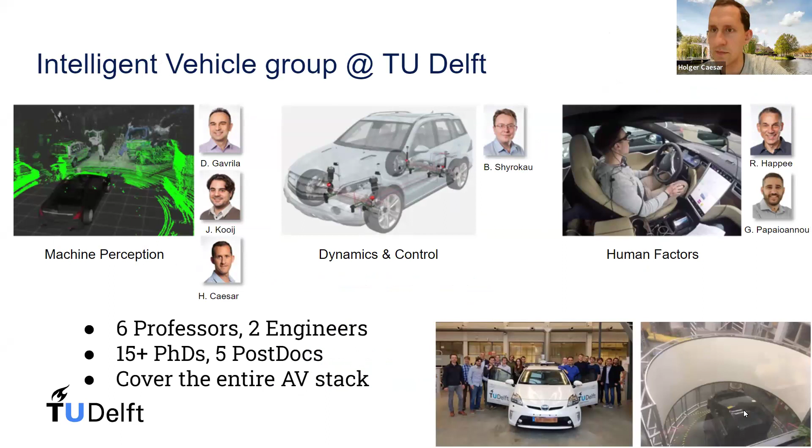And for those that have never heard of Delft before, Delft is a small town, a little bit like a miniature Amsterdam in the Netherlands between The Hague and Rotterdam. So if you want to visit us, you're always welcome to come by. One good reason to visit us might be the RSS conference, which this year is in Delft.

And we're actually going to demo something there, which is an advanced vehicle summoning feature. So a bit like the Tesla, but more advanced, hopefully, in that it evades pedestrians, cyclists, etc. on the way. And this is very much built with Autoware. So we really wanted to go away from our custom in-house build to something more standardized and shareable, with a nicer architecture.

Okay, now I want to talk a little bit about my own work. My overall research goal could be phrased as how to collect, annotate, train, and evaluate sensor data more efficiently, and also, as Rahul said, at scale. So data collection sounds easy, creating new data sets. Annotation is especially auto-labeling, so how can we automatically label vast data sets? In terms of training, we're looking at lesser forms of supervision, but also foundational models. And then evaluation, especially also simulation as a tool for evaluation. And that's exactly what I will talk about today, although I do have to skip the training part since we don't have that much time. But maybe another time.

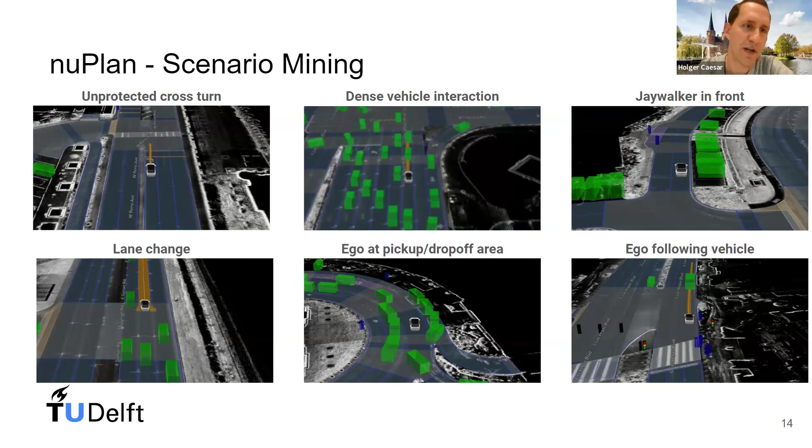And the idea is basically that you should not just evaluate on just driving straight most of the time, but you should be evaluating on specific scenarios to really see what is the performance of my planner on lane changes, what's the performance on jaywalkers, etc.

And we also extracted traffic lights. So of course, you can use computer vision to detect traffic lights, traffic light bulbs. But what we did was to go with the motion. So we used the motion of these agents. And when they're moving, then we set the traffic lights to green. And when they're not moving, or when there's no observation, then we set it to red.

Of course, it's not perfect, but it's quite nice. And for your simulation, you get data from all sides of the traffic light, from the intersection, not just the one that you're currently looking at. So that's quite nice.

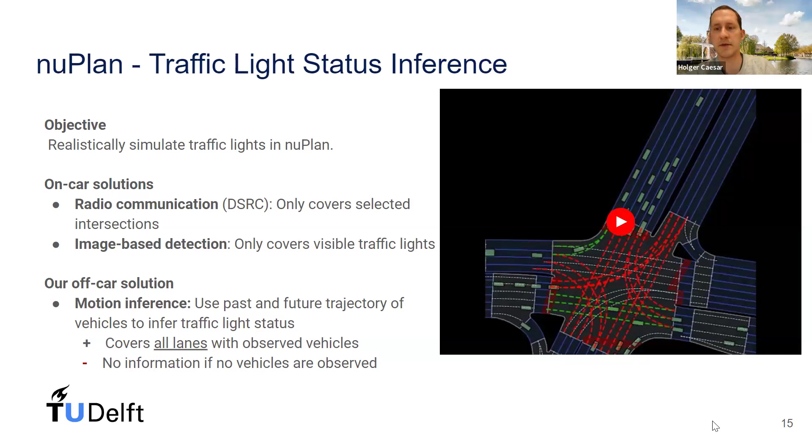Okay, going further in a separate work, we tried to improve this kind of offline perception system even more. And we also worked on offline tracking. And in particular, we wanted to integrate the prior assumption, prior knowledge about object permanence. So this is something that young children cannot do yet, but adults know very well: objects never disappear, right? They should always be somewhere.

And because our method has both a map as input, but also the assumption of object permanence, that's why we're nicely able to track objects even while they are occluded, which most of the other offline perception systems are not able to do. And that, of course, is very nice when you want a data set where you never actually lose tracks.

And what we do is we kind of remove the ground plane, we cluster these objects, we do some tracking, and then also self-training to have a detector that is a bit more consistent, because in the beginning, for example, static objects, you don't get them. But after a few steps of self-training, you do capture them.

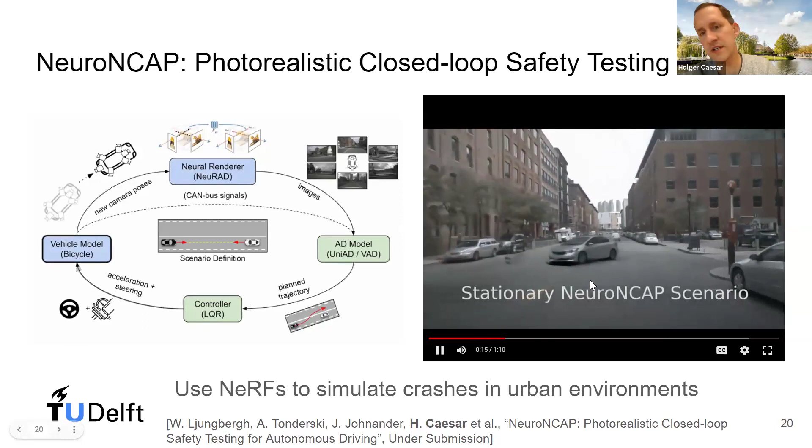So this is the original dataset, normal driving scenario. Now we go back and we have three different scenarios. One is a car is static, so the car is just parked here and you need to avoid it. And the other scenarios are here on the left side, a car comes racing towards you. And on the right side, a car comes here from the side. So it's static, frontal, and side.

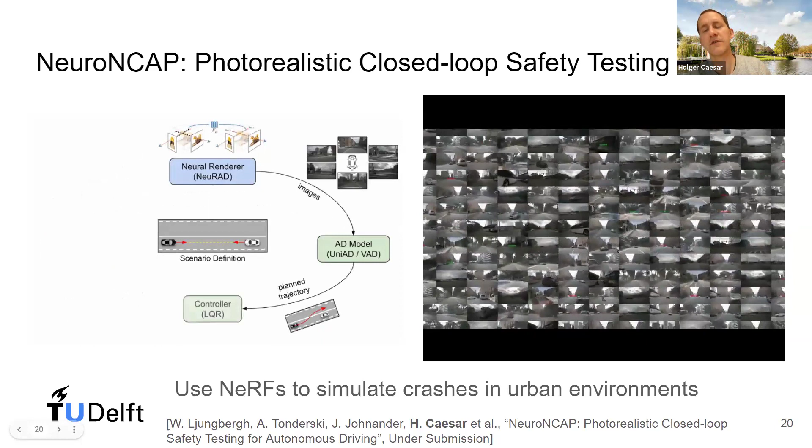And then we just run these state-of-the-art planners on it, and we see that half of the cases, they crash, which is very shocking. But we hope that with this kind of standardized benchmark in the future, people will develop better planners. And the idea is, of course, they are doing not so well because they've never seen these kind of crash scenarios. So maybe by training for these scenarios, we will be able to develop planners that are able to cover these scenarios. Okay, then moving on.

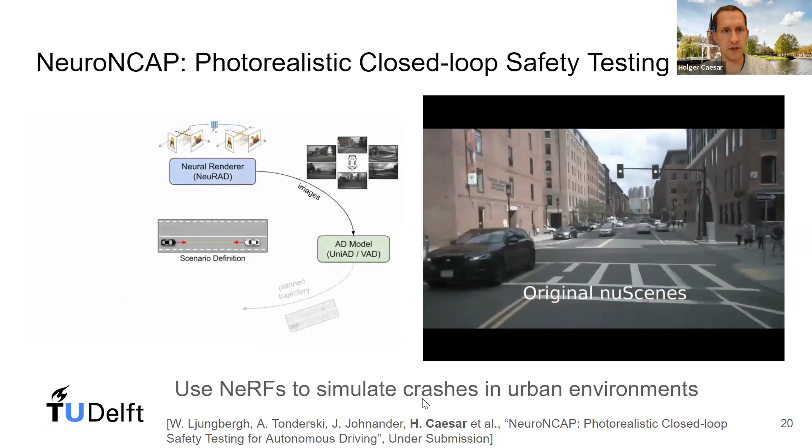Okay. A few other topics that don't really fit into the theme here are, for example, using raw 4D radar data. So this uses from a 4D radar the radar cube data. So you can imagine here azimuth, elevation, and range. And then we project that down to a bird's eye view and a front view, and we also fuse it with camera. Run some transformers on that, cross attention.

And this gives pretty nice results on this K-Radar dataset. So it's a dataset with really tough conditions, snow, fog, rain, etc. And we actually managed to outperform even the best camera plus LiDAR method using camera plus radar. Because, of course, the radar can kind of penetrate through this adverse weather and get really good performance here.

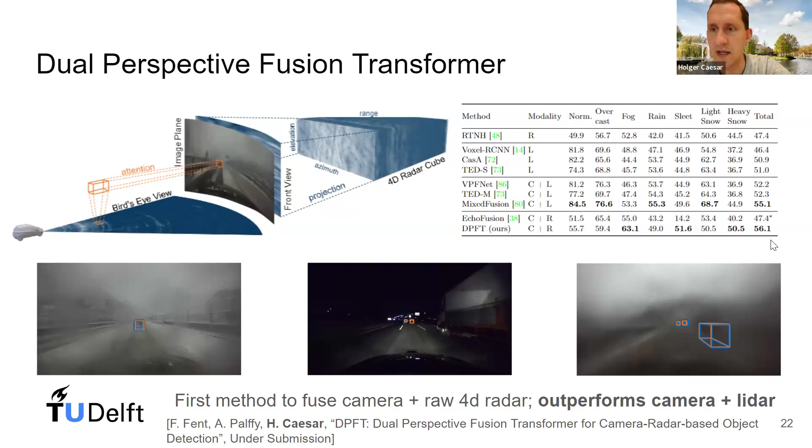And the last work is the ongoing work, trying to bring this all to bicycles. So as I said, hopefully Raoul will drive it someday. So we put three LiDARs on a bicycle, also three cameras, IMU, GPS. And now we're trying to capture data from that. And we're trying to basically develop nice models for perception and prediction and so on to really understand how bicycles move. And this can be helpful for cars, but also, of course, for bicycles themselves, to optimize our cities for that, etc.

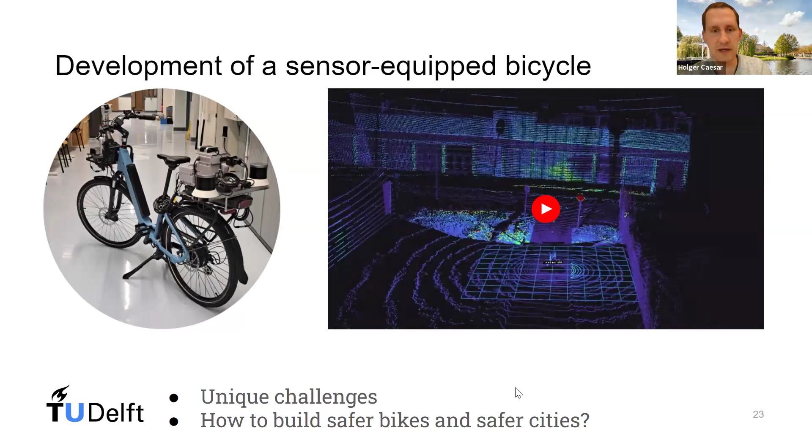And there are many unique challenges, such as the roll of the bike, the fact that the frame is not rigid, so calibration is a mess, and many other challenges. And if you want to know more about that, we can have a chat about that. Okay, so to summarize, my work is about how to collect, annotate, train, and evaluate sensor data more efficiently to hopefully develop more scalable autonomous driving solutions. That's everything. Let me know if you have any questions.

Yeah, hi, Professor Caesar. I'm from University of Delaware. I have a quick question about NeuroNCAP. So right now, what we're doing at the University of Delaware is we're trying to standardize a set of simulators that the autonomous vehicle needs to have when it goes through testing. Because if you're just testing using CARLA or Unity, the sensor model isn't that good.

So we've created a framework that allows all the state-of-the-art simulators to communicate with each other and be synchronized with each other. And I see in NeuroNCAP, you said you use NeRF to recreate the scene. So can I ask, how is it that you arrived at this combination of simulators that generated photorealistic data?

Yeah, I think it's just really the fact that we want to synthesize, especially the agent, right? So the environment is, of course, something we could do for a long time. But now with this new generation of NeRFs, we're also able to synthesize the agent. And I think that's something we were missing in the past. If you look at the work done by Waabi, for example, Raquel Urtasun, there was still room for improvement. So I think it was a natural choice to work with NeRFs here.

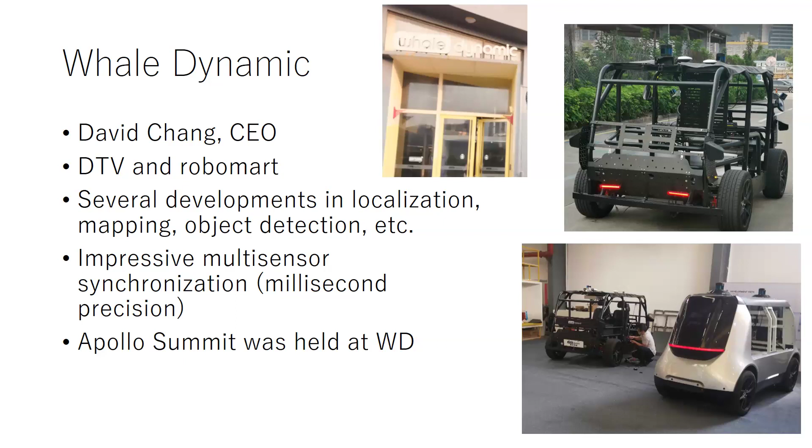While I was at PIX, I had the chance to meet with Cristian Gariboldi, who is present here. He is a master's student at the Politecnico di Milano and also at Xi'an Jiaotong University, in a dual degree program. He's been working with PIX Moving as an intern and doing his research there. He has a very interesting topic. We discussed where to present it and considered that the Center of Excellence is a good opportunity. So if you allow Cristian a couple of minutes to briefly present what he has, I would really appreciate it. That's all for me. Thank you.

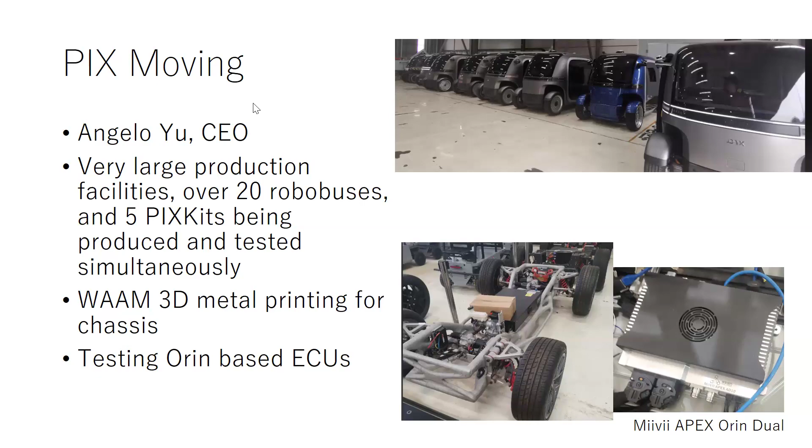Thanks, Alex. These are a lot of very exciting engagements across China, and I think they have fantastic facilities. And thanks to Gordon for organizing this. I hope we can have more engagement with the universities from the mainland and that they can participate. One of the key things is for universities or members to participate in these member meetings.

And going back, Alex, to the Autoware workshop. Could you share how many speakers are confirmed and how many contributed papers there will be? Then in the course of the next week we can share the program with everyone, at least a draft, because we still have some time. The main reason I'm asking is that if we need to, we can get other members from the CoE to fill up the agenda. Yeah, the agenda is currently an interesting challenge because the foundation would also like to see some industrial members joining the workshop.

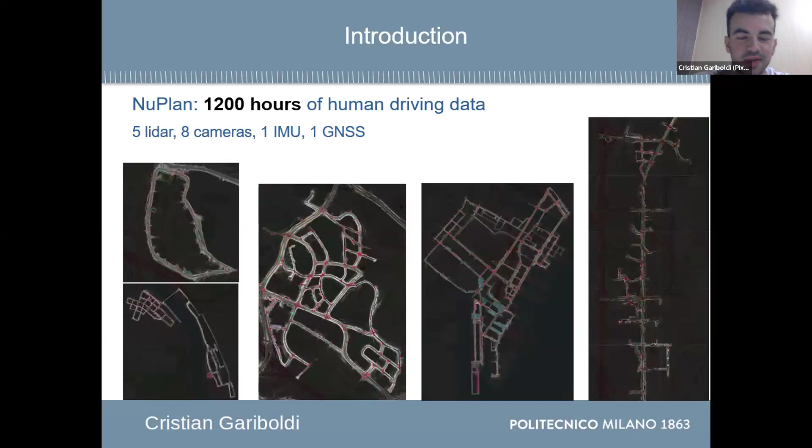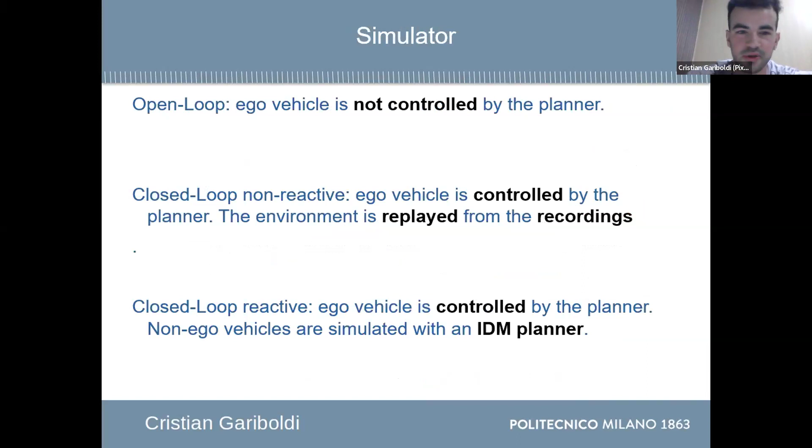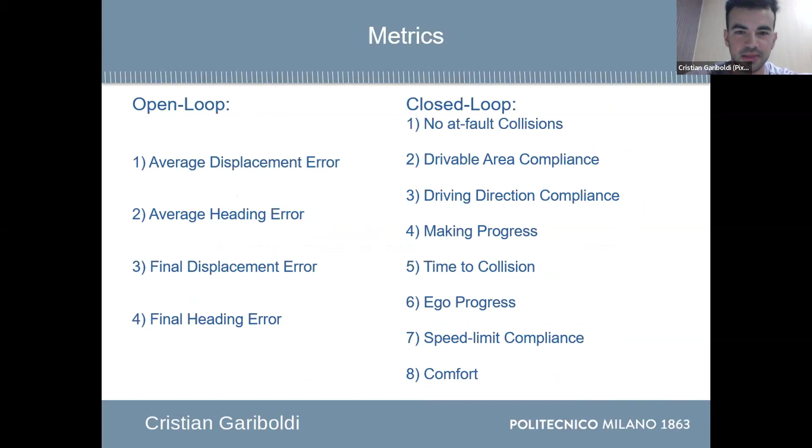And the simulator offers some metrics, open loop and closed loop, which are great for evaluating the planner, for imitating the human driving style, and also to check if it has a safe closed loop driving. And these are the metrics. I analyzed some baselines, and we can recognize a pattern. We have some learning-based, rule-based and sample-based planners here. The first three are learning-based planners, and they are excellent for imitating the human driving style, as they can score high open loop performances, but they cannot provide a safe closed loop driving.

Also, as Caesar said before, if you try to evaluate them in unseen scenarios, their performances drop dramatically. On the contrary, rule-based and sample-based planners cannot imitate the human driving style, but they can score high closed-loop performances. That's why I decided to design a single planner that can provide both high open-loop and closed-loop scores by combining learning-based and optimization-based planners.

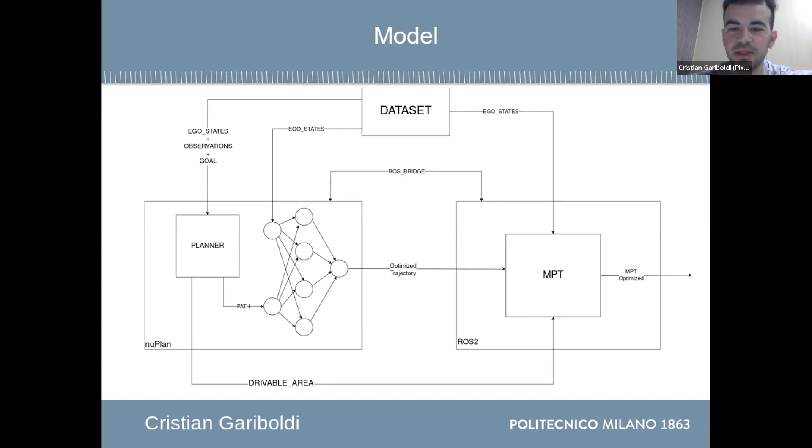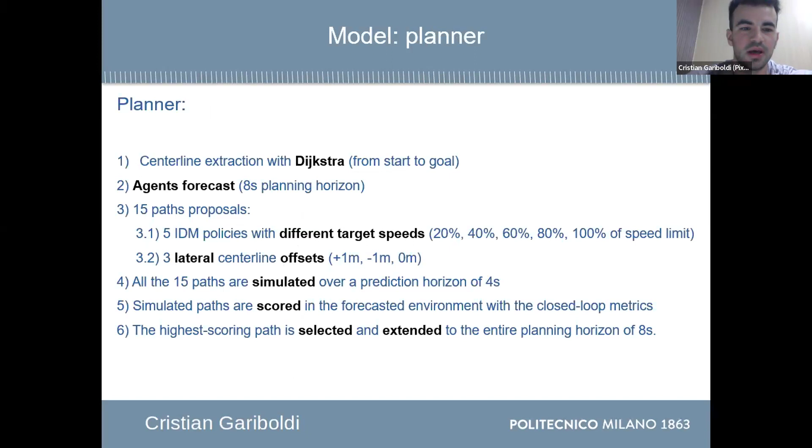So on the left, I developed this learning-based planner, which is integrated with the ROS2 environment with a ROS bridge. Within the ROS2 environment, I'm using the MPT, which is Model Predictive Trajectory developed by Autoware. These are the details about the blocks in this scheme. But the important thing is that the planner provides a center line, a path, and the multi-layer perceptron optimizes that path to minimize an L2 distance between the human trajectory and the input, so that it can output a human trajectory. Then it gives the trajectory to the MPT, which optimizes it and makes it safe for driving autonomously, also for unseen scenarios.

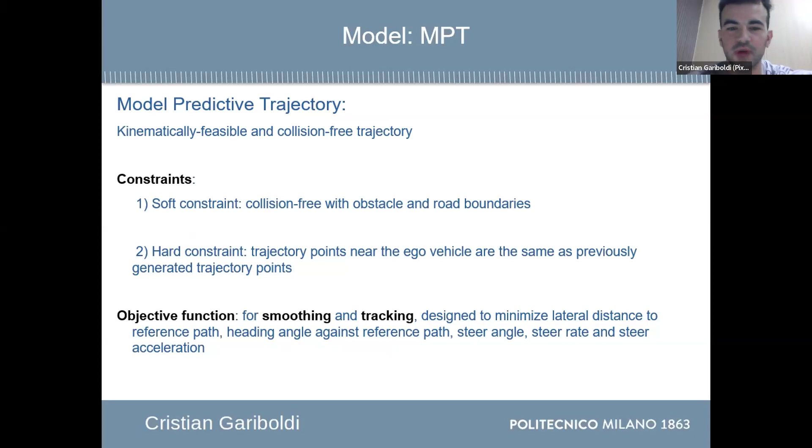And I tested this planner in the ROS2 simulator because there are some advantages. The first one is that the simulator has the same control and planning algorithms as the real vehicle, because my final goal was to apply this planner to the real vehicle. The second reason is that in the ROS2 simulator, I could use different maps and different scenarios, so I could test the generalization and robustness capabilities of the model.

And I think there are two limits of the NuPlan evaluation metrics. Maybe we can discuss it later if we are interested. The first one is that NuPlan evaluates the ability of the planner to perfectly imitate the trajectory of the human driver in that specific scenario. But personally, I think we can achieve very good human trajectories even though we don't perfectly imitate the one in the simulator. The second one is that NuPlan evaluates the predicted trajectory, but not the one actually traversed by the ego vehicle.

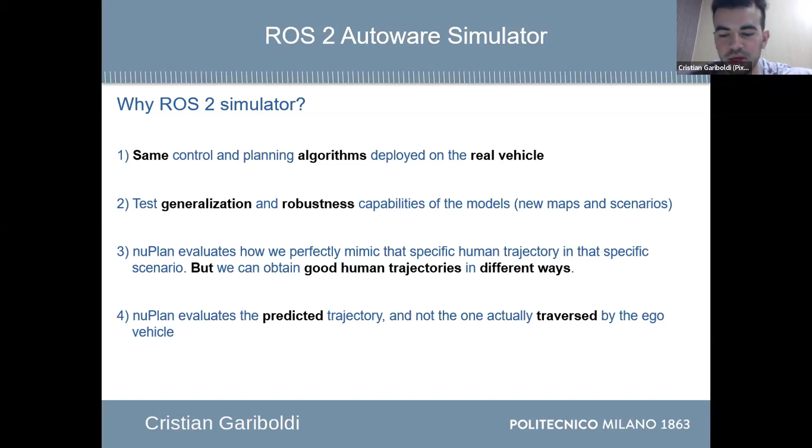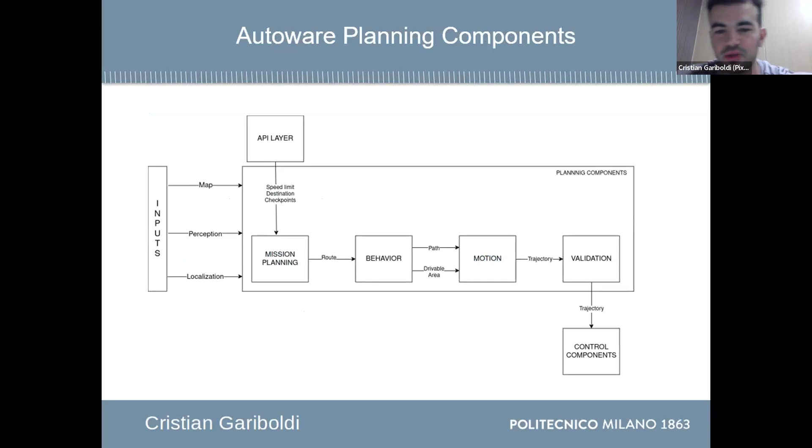Since I wanted to develop my model for the real vehicle in the Autoware environment, this is the Autoware planning component structure. We have a mission planner, a behavior path planner, a motion planner, and in the end, we give the final trajectory to the control components. So what I did is I added this block between the behavior and the motion planners, so that we take as input the behavior path and optimize it to generate a human trajectory, which is given to the motion planner, the optimization-based planner.

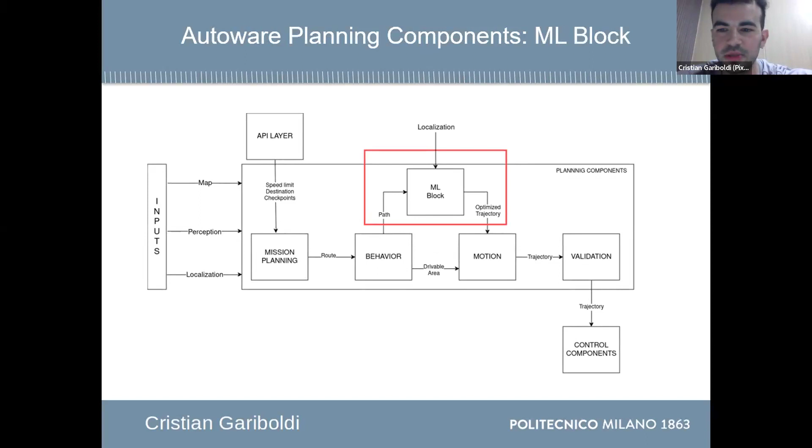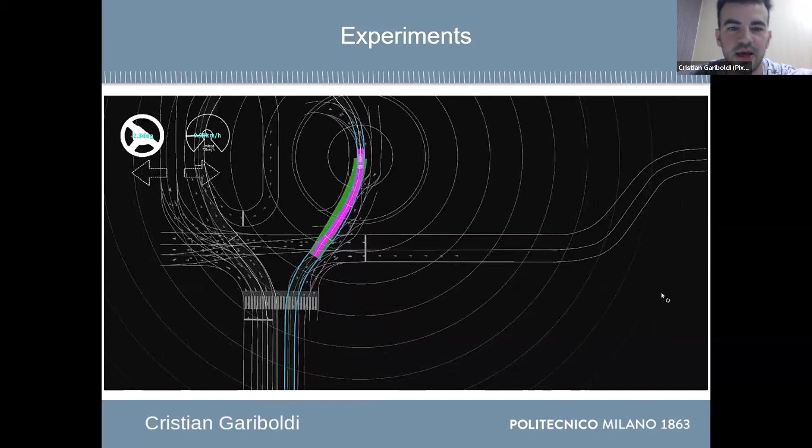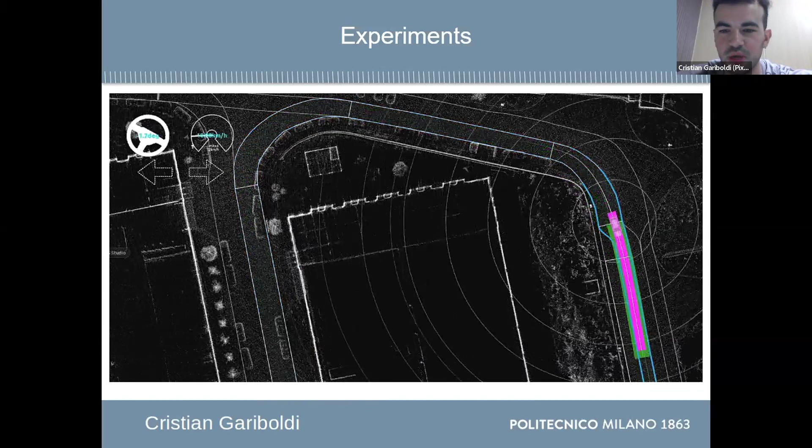And it can optimize it and make it safe. And these are some experimental results. So the green trajectory is the neural network trajectory, and the purple one instead is the one after the optimization process. And I did several tests in different maps for different scenarios. And as we can see, the neural network cannot remain inside the boundaries perfectly, but instead, after the optimization, we have a very good behavior and trajectory.

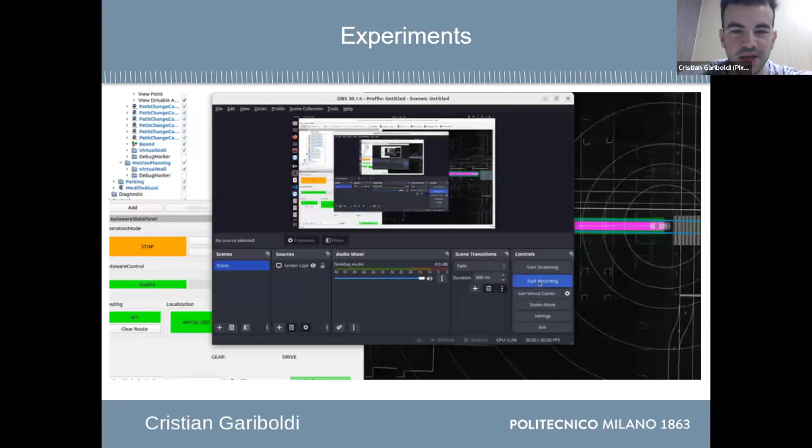So, okay, this is just other tests and simulations. I will go fast here. These are just some pictures about how the learning-based trajectory is optimized by the MPT in order to remain within the boundaries and to be a very good one also in closed-loop driving.

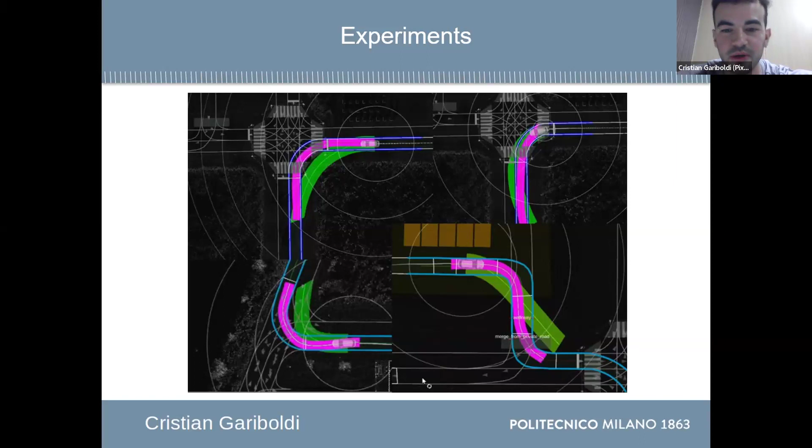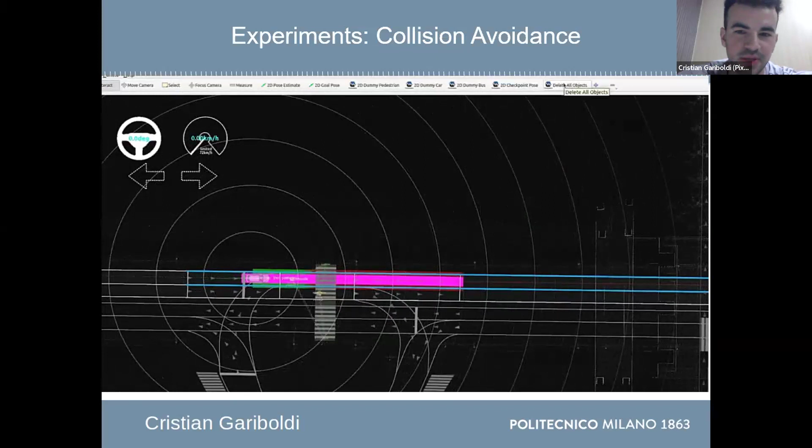I also tested some obstacle collision avoidance scenarios. So in the simulator, you can place some pedestrians on the street and see if it crashes or not. As expected, the car stops, and if you remove the pedestrians, it starts again.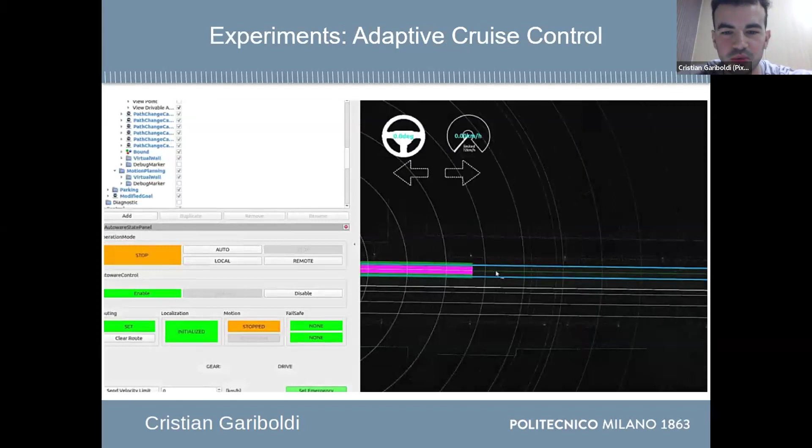I also tried to do an adaptive cruise control test by placing a car in front of us, which is slower, and to see what's the behavior of the planner. So as expected, the car slows down, and then when the car changes lane, the ego vehicle starts again.

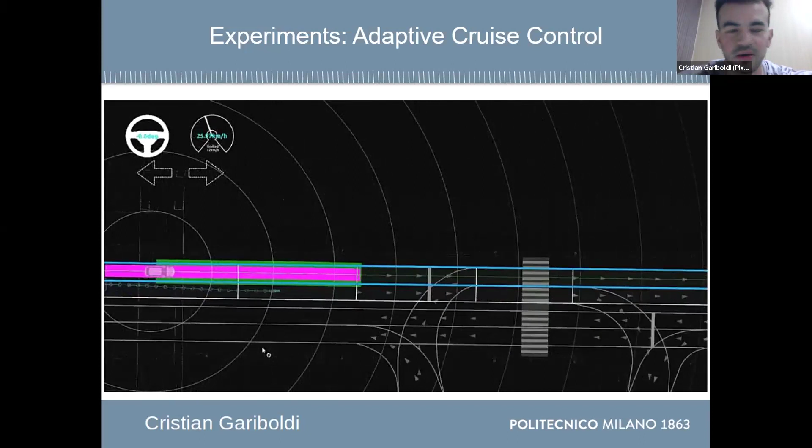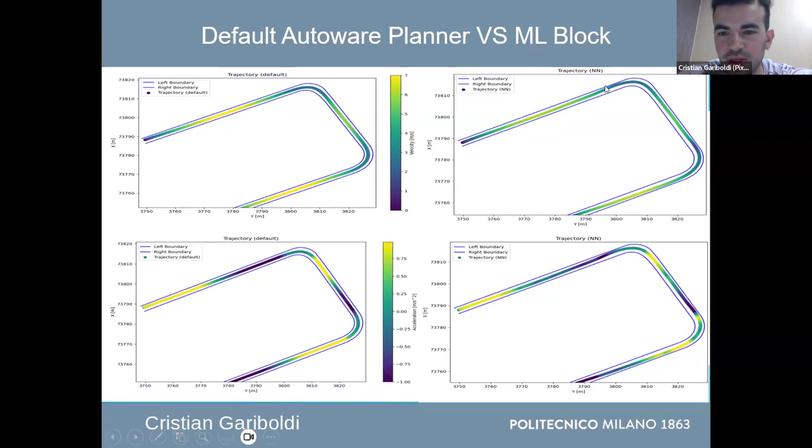But in other scenarios, the difference is bigger, like here on the left. The optimization-based planners are very geometrical. They follow almost the center line, while the learning-based, the hybrid planner, actually during the turns, just takes a larger turn in order to minimize the acceleration profile, also, as we can see on the bottom.

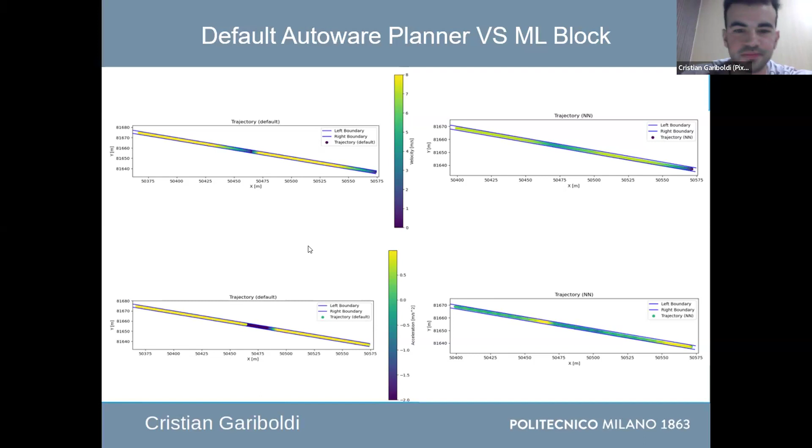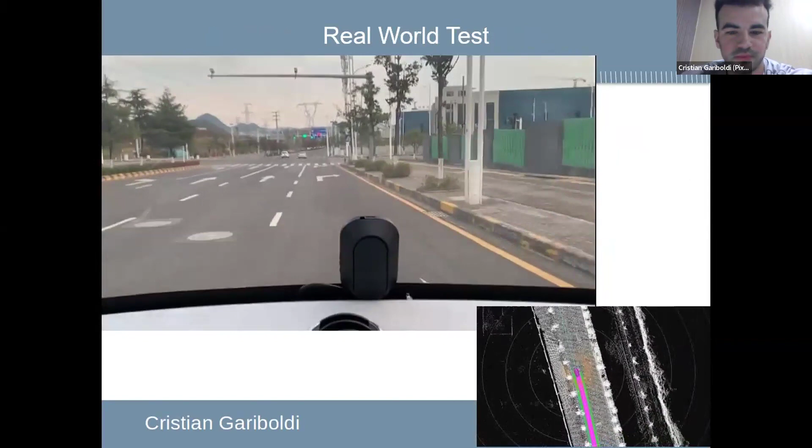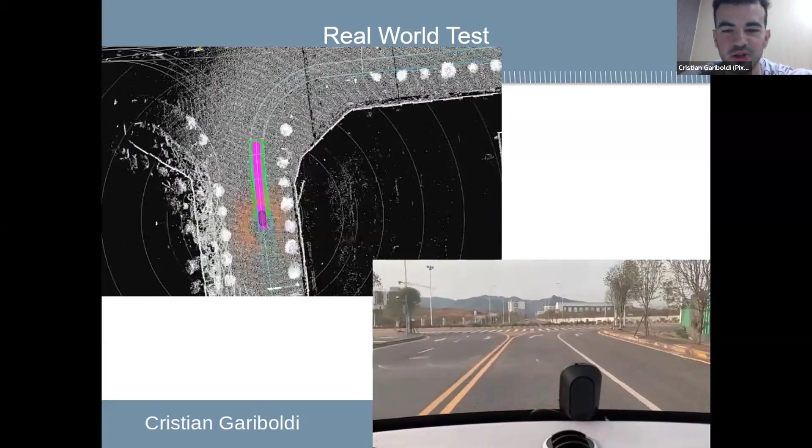And I also did some real-world tests on this L4 autonomous vehicle that we developed in PIX Moving. And it works pretty well also in real-world scenarios. And I did several tests, but of course, I couldn't test the vehicle in so many different scenarios, as we just have this kind of place where to test the vehicle.

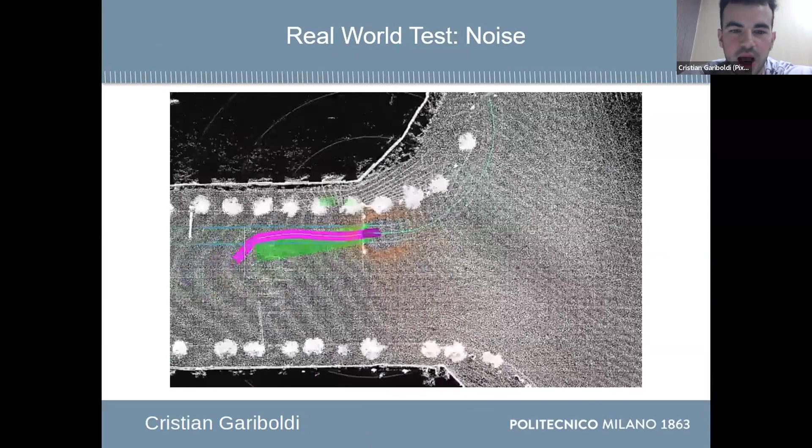But I noticed that the planner works well at low speeds. When we try to increase the speed, actually, it becomes unstable, as we can see here. And I think that the reason is noise. So I tried to introduce some noise in the simulator as well to see what's the reaction of the planner. And this is the result.

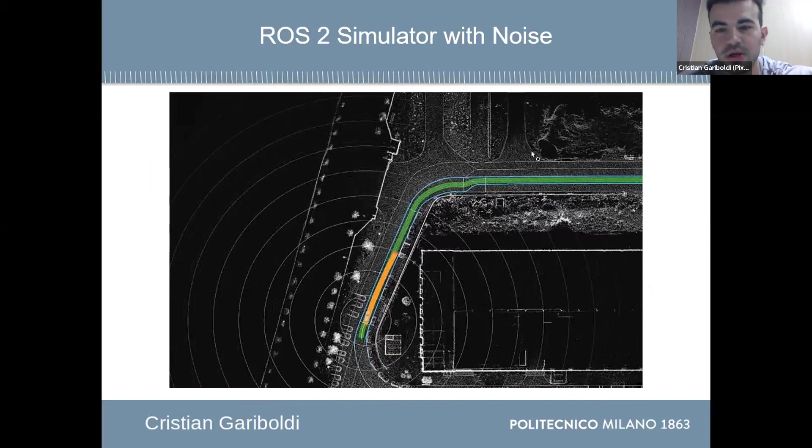Also here, when there is a step in the drivable area, the optimized planner just tries to follow the step, but instead the learning-based hybrid planner ignores the step of the drivable area and goes straight.

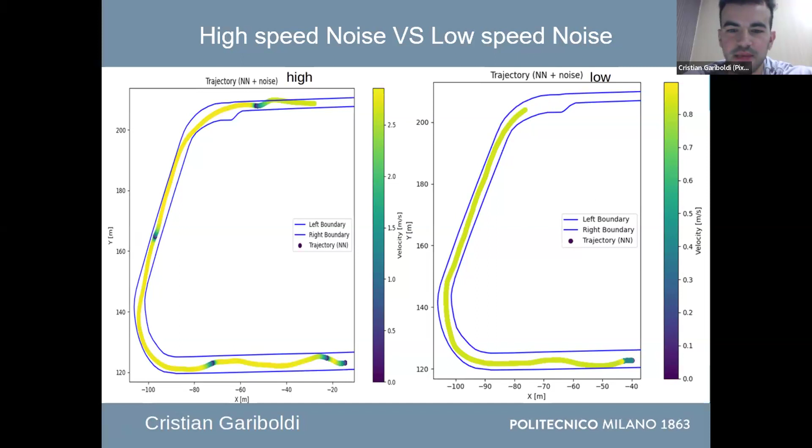And these instead are results with adding the noise. The noise is a Gaussian noise, and with high speed on the left, we have a very unstable trajectory, like in the real test with the robobus. When instead the speed is low on the right, the trajectory is not very good, but it's not as unstable as the one on the left. And we can notice the same thing with the velocity profile, as you can see here.

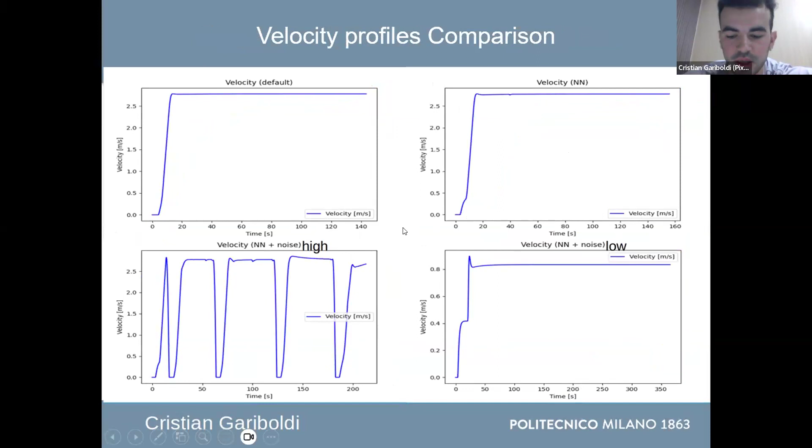And I also plot some velocity profiles and acceleration profiles in all the scenarios. So the default planner of Autoware, on the top left, this instead is the hybrid planner. And these are the velocity profiles with the noise for high and low speeds. And this is for the acceleration.

So yeah, this is the research I'm doing in PIX Moving, and I was excited to present it here today, since there are people from both Autoware and NuPlan. And I'm open for any kind of feedback or discussion, but I think it will be interesting maybe, since I know that in Autoware some people are working in learning-based path planning, but so far we just have sample and optimization-based planners. So I think this integration could be interesting at least.

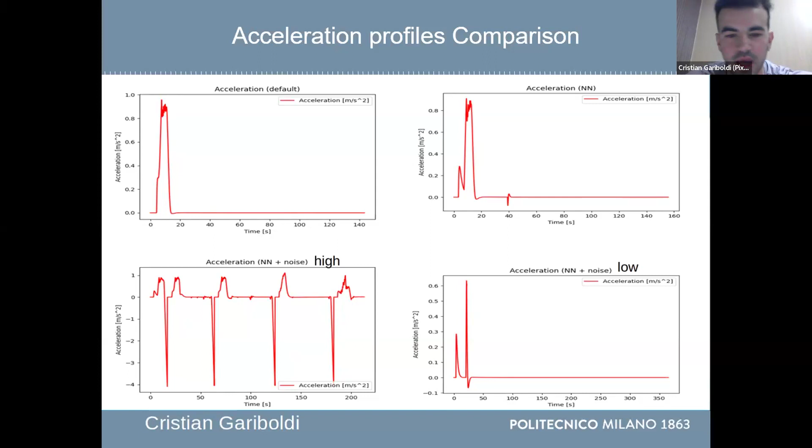Thank you so much, Cristian. I think it's amazing that you got IL working for real. I think that's also very brave and bold, but it's really quite something to see it operating for real. And this you did as your master's thesis? Yeah, actually, I'm doing an internship in PIX Moving while I'm working on my master thesis, and this work is supervised by my professor for the master thesis. Okay, that's fantastic. I think the safety issue obviously will be critical with any IL-based approach.

Does anyone have any quick questions for Cristian? Yeah, very briefly, Cristian, and great work. I'm just curious. What really blows my mind here is that you talked about the real vehicle and PIX Moving and the robobus, and I guess we'll have to improve our internal communications. It's the first I heard of it here at PIX, but it's wonderful. How was the experience with the actual vehicle? Could you just say a few words on that?

Yeah, for sure. So with the real vehicle, as I proved with the results, actually it's good, especially at low speeds, as the neural network takes as inputs some data from the localization directly. So it's very sensitive to noise. And when you try to increase the speed of the vehicle, the trajectory becomes unstable, and you can feel it on the real vehicle. But I think there is an easy solution for that.